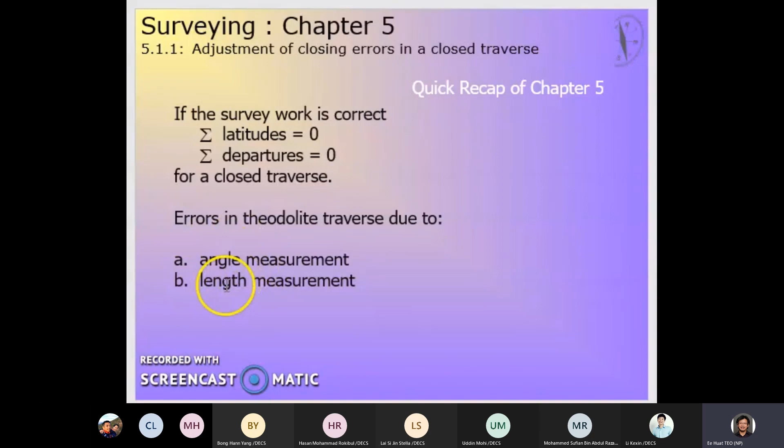However, we'll always be bound to make measurement errors when carrying out the traverse survey, and the error can be in terms of error in angle measurement, or it can also be in terms of error in linear or distance measurement.

So if you have an angular misclose, it means that the sum of the interior angles in your figure is greater or less than the actual sum of the interior angles. You can check whether the error is acceptable or not, and if it is not acceptable, then you have to redo the survey all over again.

Even if it is acceptable, you will still need to distribute the errors to make the angle more accurate before you continue with the rest of the calculations.

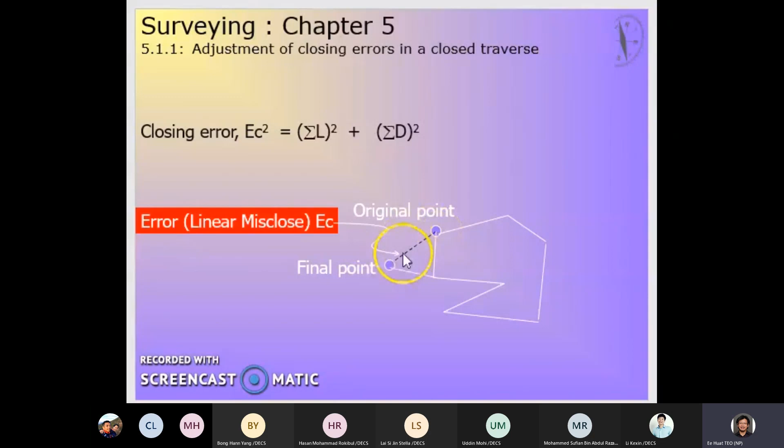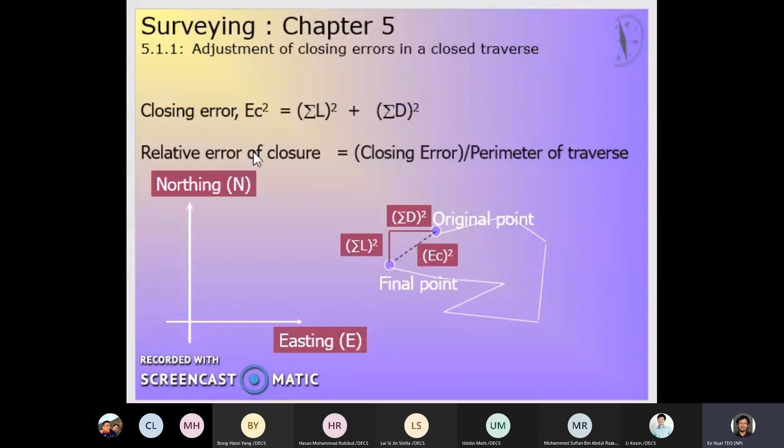Even if it's accepted, you will still need to carry out distribution of the linear misclose to make your data even more accurate. That is the next part that we will be talking about.

Also, we are saying that even if your error can be accepted, the latitudes and the departures should be adjusted so that the sum of the latitude equals 0 and the sum of the departure equals 0.

So the process or operation of applying correction to the latitudes and departures of the lines, we call balancing the traverse. There are two ways to balance the traverse: you can use the Bowditch method or the transit method. For this module, we are just going to stick to the Bowditch method.

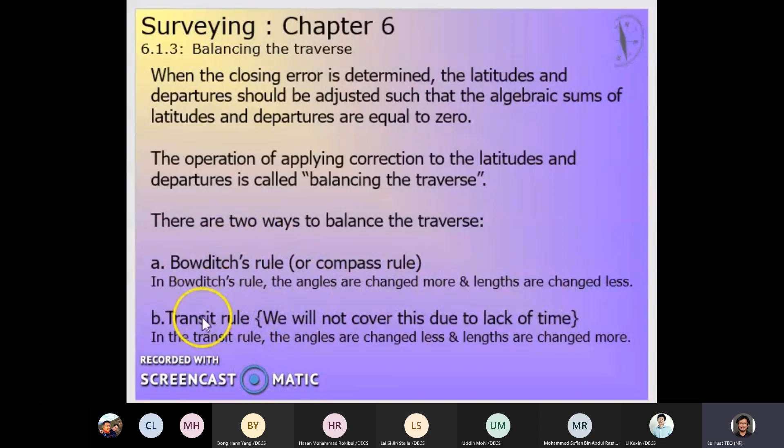In the Bowditch method, the angles are changed more and the lengths are changed less. For the transit method, it's the other way around. We use the Bowditch rule to distribute the linear misclose when the angular as well as the linear measurements are taken with equal precision.

By this rule, the total error in latitude and departure is distributed in proportion to the length of the side. So the formula is this: correction to the latitude equals negative the total error in latitude multiplied by the length of the line divided by the perimeter of the traverse. In the same way, correction to the departure of the line equals negative the total error in departure multiplied by the length of the line divided by the perimeter of the traverse.

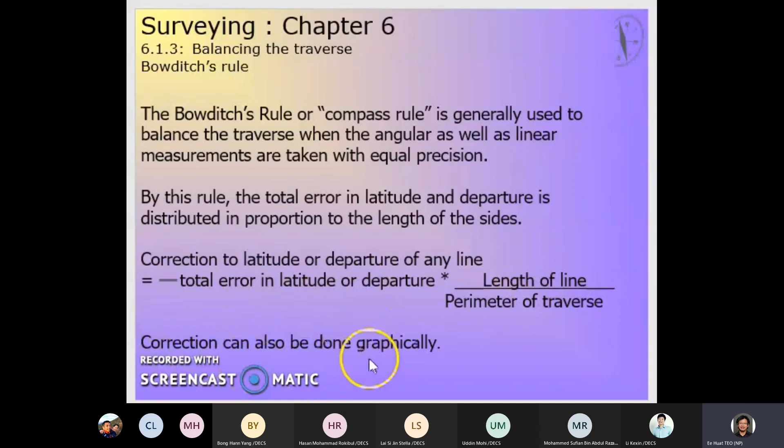Correction can be done graphically, but normally we do it numerically, that means we work out the value.

Now this is example 1 in your notes talking about the two coordinates A and B, and given the coordinates you can work out the whole circle bearing, so on and so forth. You would have gone through this in chapter 5, so I will leave it as it is and we'll go on to example 2.

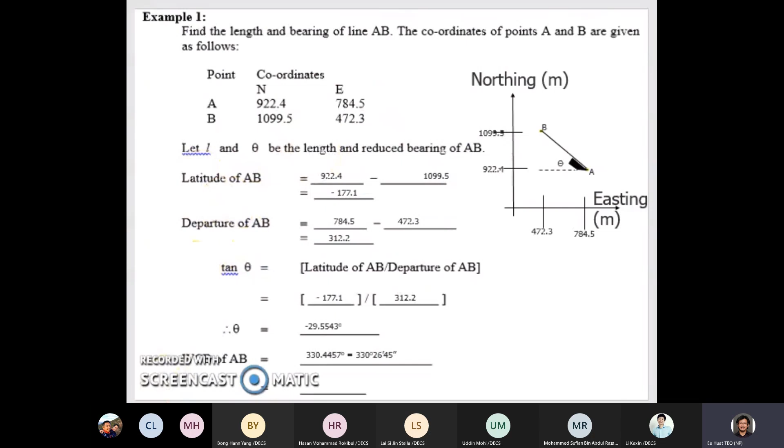...coordinates, you can also check what is your relative error, and then after that you can do the balancing using this Bowditch method.

So let's look at how to do it, and we will start by drawing the lines AB, BC, CD, and DA because we know the bearing.

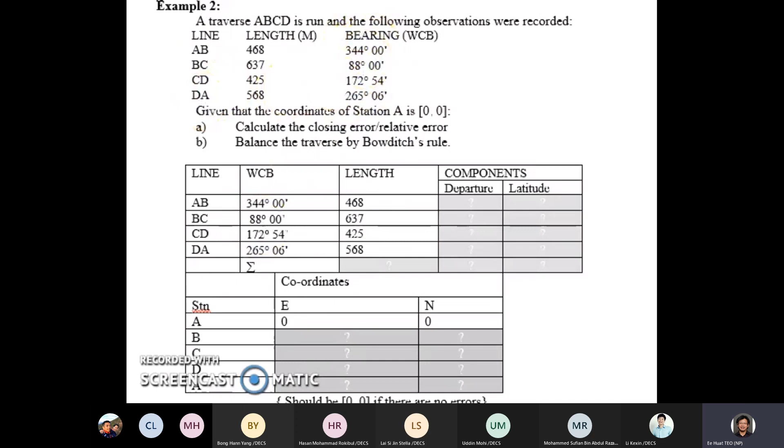So if our north is pointing in this direction, then AB will be probably in this orientation because it's around 344 degrees. Then BC will be in this direction because it's around 88 degrees. CD will be in this direction because it's around 172 degrees. And then DA will be in this direction because it's 265 degrees around there, okay?

So the lengths are given to you. So for every line, starting from AB, you can go and work out what is the latitude, what is the departure.

Okay, so let's do that. By now, I would expect you to know how to calculate the latitude and the departure for all the lines. So for example, AB, I will expect you to get the latitude if you know the length and you know the bearing.

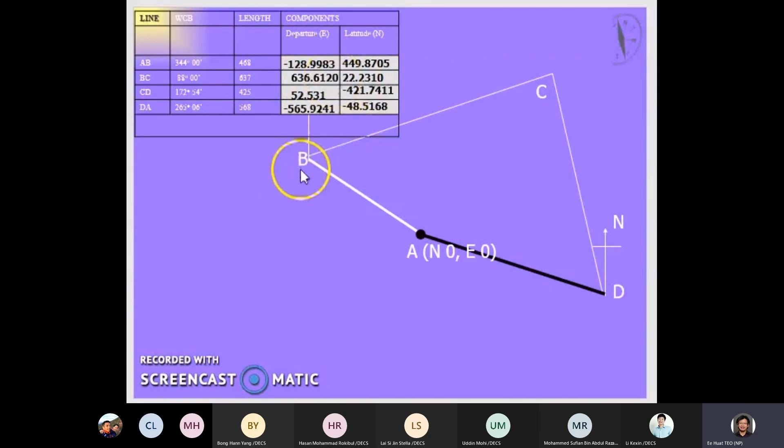Once you have all these latitude and departure values, you will be able to work out the coordinates of stations B, C, and D, because you know the starting coordinates of A, which is 0, 0. You can then just take the northing plus the latitude, the easting plus the departure to get the next coordinate, northing plus latitude, easting plus departure to get the next coordinate, and so on and so forth.

I'll leave it to do that, and it should look something like this. So this should be your coordinate. A should be 0, 0. B, your coordinates - take note, normally we will write the northing first and easting second, but this one is the reverse order, so just make sure you are careful about that.

So for B, this will be the set of coordinates. C, that will be the set of coordinates. D, that will be the set of coordinates. And you can actually do a calculation of this point A, and you find that it is not 0, 0. It should be 0, 0, but it is not.

Meaning that you started off with point A, then you go to B, you go to C, and then you go to D. Then by the time you come back to A, you actually miss closing to point A. You are a bit of a distance off. And this is the calculated coordinate of point A, so that's why there's some linear misclose.

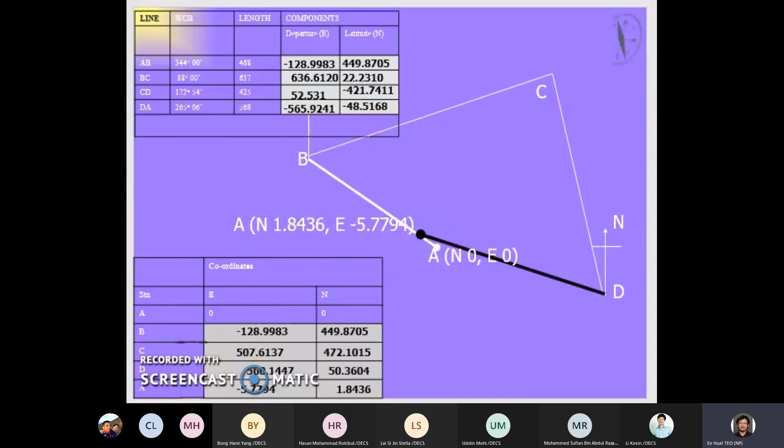So you sum up your latitude, you should be getting a value of 1.8436. You sum up your departure, you should be getting a value of minus 5.7794. Then you can find out what is your linear misclose - square root of the square of your latitude plus the square of the departure, then you take the square root. You should be getting 6.066 meters.

And your relative closing error will be 6.066 divided by the total distance of your traverse, which is distance AB plus BC plus CD plus DA, which is 2098 meters. So you go and take the ratio - it will be 1:346. So 1:346 actually is worse.

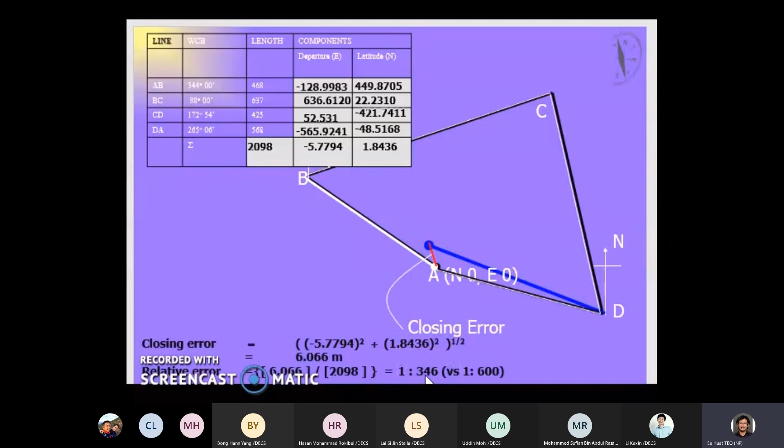Worse than 1:600. In real life, if it is worse than 1:600, that is no good, and you cannot use the data. You have to redo the field exercise to collect the length and the angles all over again. But for this exercise, let's continue.

Let's just use the value here to do the Bowditch method to distribute the linear misclose - so much for the departure and so much for the latitude - so that you get a feel for how to use the formula to do the distribution.

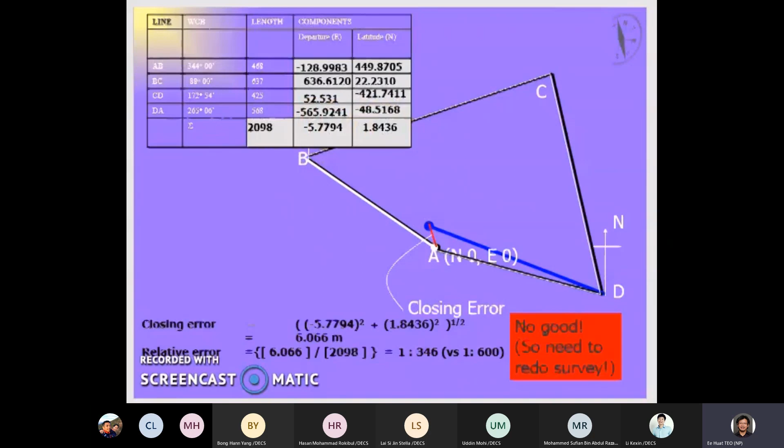So let's start with the line AB. The line AB, the length is equal to 468 meters. Total length of the traverse is actually 2098. So the formula for correction to the latitude will be the error in the latitude. In this case, our error for this example, the total error is 1.8436.

So there's a minus one sign, so be careful, minus sign in front. So multiplied by the distance of the line divided by the total distance of the traverse, you will get a value. You can round it up to 4 decimal places first and use that.

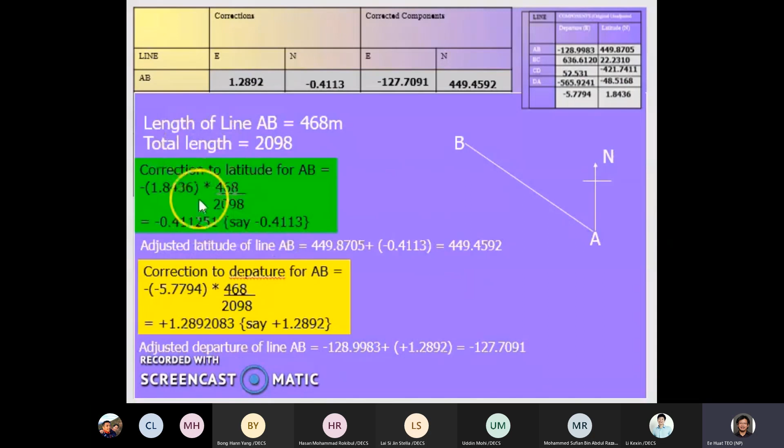Once you have the correction to the latitude, you can adjust the latitude of the line. Originally, your latitude of line AB is 449.8705, that's the original calculation. You add your correction, and this is your adjusted latitude.

So you do the same thing for the departure. For AB, since it's departure, you need to get the value of the departure, not the latitude. So the total departure, summation of your departure, is minus 5.7794. So you put it here. If your departure is a negative value, you put a negative value, so there's a negative in front. Negative times negative ends up positive. Whereas just now, a negative times positive gives you a negative value.

The length of AB is still 468, the total length of the traverse is still 2098. So you work out this number, you'll get positive 1.2892083, and you round it up to 4 decimal places. So now your adjusted departure of line AB will be your original departure plus this particular correction.

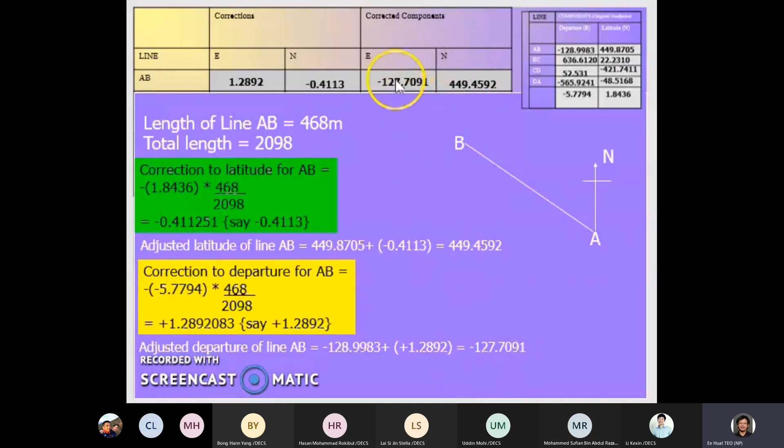So you can have a table to put in your adjusted latitude and your adjusted departure, and you continue to build up your table.

Now let's look at line BC. For line BC, the length is different, it's 637. So your correction for line BC will be 637 over the total traverse distance, and your latitude will still be the same value of 1.8436, so you can put it there and round it up to 4 decimal places.

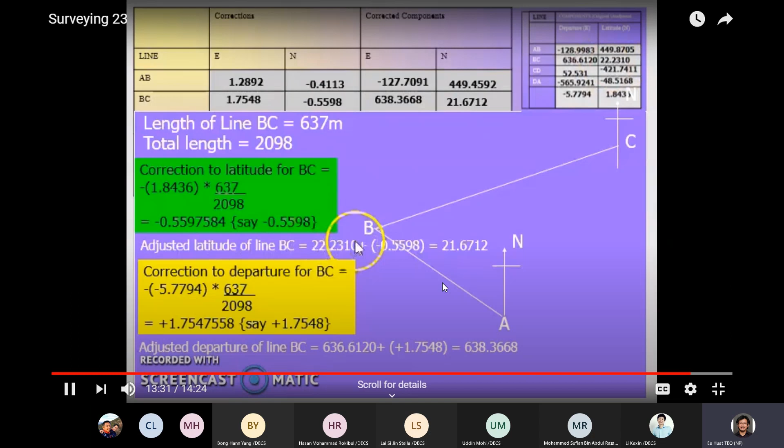You'll get minus 0.5598. Your originally calculated latitude was 22.2310, so now your adjusted latitude will be 22.2310 plus this correction, giving you this value, which you put into the table.

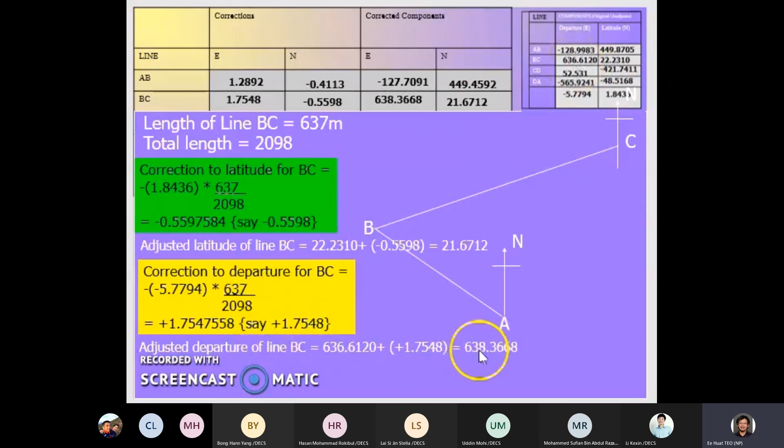The correction to the departure for line BC is done the same way. You find the total departure, summation of the departure, which is this one, and again there's a minus sign in front, so minus times your negative number gives you a positive number. The length of BC is actually 637 meters, so you put 637 meters here and round it up to 4 decimal places. Now you can find the adjusted departure for line BC by taking the original departure plus this correction, giving you the adjusted departure, which you put here.

Let's continue with line CD. Again, the distance is different, 425 meters. So the correction to the latitude of line CD uses 425 meters divided by the total length of the traverse. The sum of the latitude is 1.8436, so you put that down, and you get a negative value. Round it up to 4 decimal places, you get negative 0.3735, so your adjusted latitude of line CD becomes negative 421.7411 plus this negative number.

So that's why you get negative 422.1146. You can put that under this particular cell.

Continue with the correction of the departure for CD. You take the sum of the departure, which is minus 5.7794, multiplied by the negative sign, then you get the positive number. Round up to 4 decimal places, so 1.1708. Now take the original calculated departure of 52.531 plus the correction, and you get 53.7018. Then you can continue to the next line, DA.

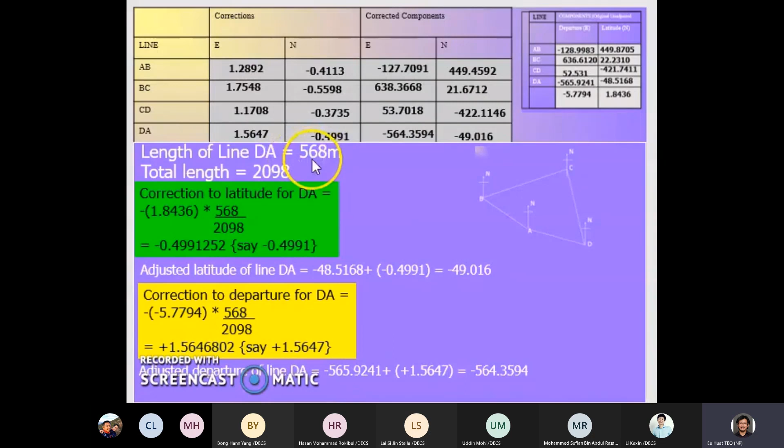So for line DA, again the distance is different, it's 568 meters. When doing the correction for the latitude of DA, you need to use the 568 meters.

Other than that, the sum of the latitude still has no change with this number here. You can round it up to 4 decimal places, and you'll get negative 0.4991. Your adjusted latitude of the line DA then becomes the original latitude plus a negative number.

Add the negative number, you get minus 49.016. So for the correction to the departure of the line DA, again use the distance 568 meters, and you can work it out. So you are going to correct 1.5647 meters. Your adjusted departure of the line DA becomes minus 565.9241, then plus this correction you get minus

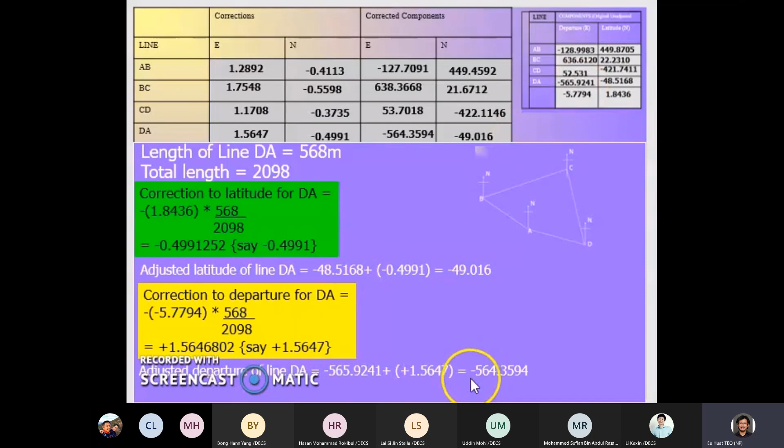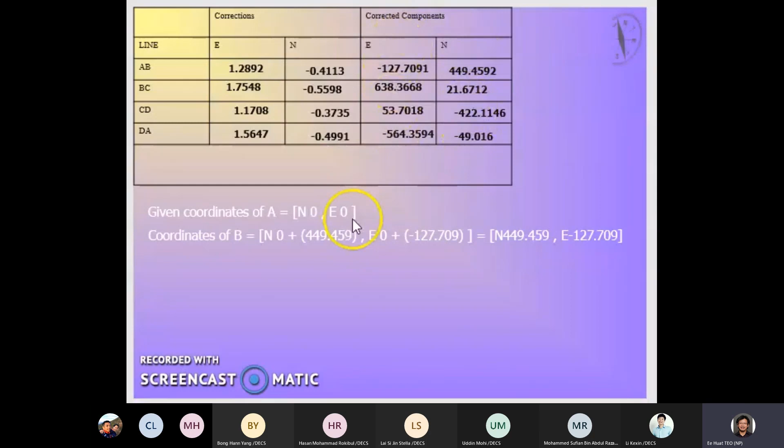4.3594. So once you have your corrected latitude and your corrected departure, you can start to calculate your coordinates all over again, and now your coordinates will be more accurate, because you already distributed the linear misclose.

So your given coordinate for station A is still northing 0, easting 0, so this one you don't need to do correction. Coordinate for B now, just take northing plus latitude - take note, this one is the latitude - so northing plus the latitude, the easting plus the departure. So you get this set of coordinates, which are more accurate compared to the previous calculation for station B.

Then for station C, same thing. You take this northing plus the latitude, the easting plus the departure, and this is the coordinates of your station C, which is more accurate.

So do the same thing for your station D. Your station D, again, the northing plus the latitude, the easting plus the departure, so that will be the coordinates for your station D.

And then you can do a recalculation to find out the coordinates for your station A. So you take the northing plus the latitude, this easting plus the departure, and if your distribution is done perfectly, you should get back the original value of your given coordinates, which should be 0, 0 in this case. But for our case, we don't get 0, 0, we get actually 0.001, or 1 mm for the northing, 1 mm for the easting.

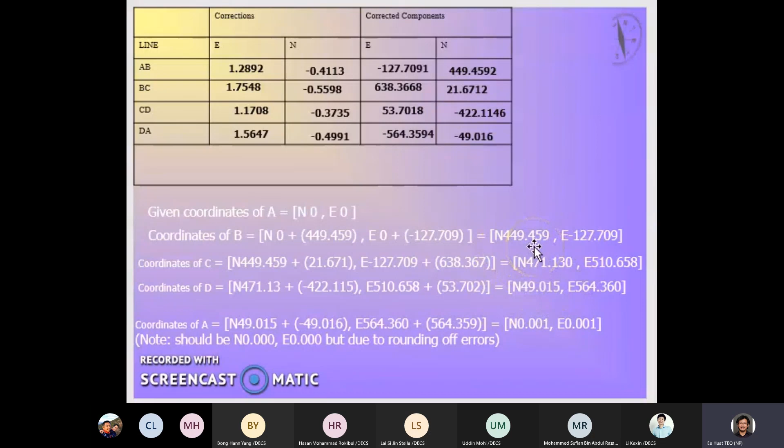That is because of our rounding off. So normally, if the difference is 1 mm, we will accept it's okay, meaning that we can accept all these coordinates for our surveying and further construction and development works. So this is a summary of the corrected coordinates, the northing and the easting, for the stations A, B, C, and D.

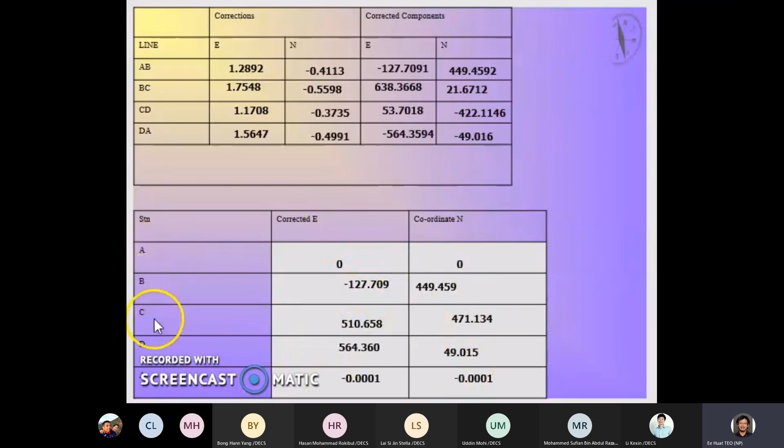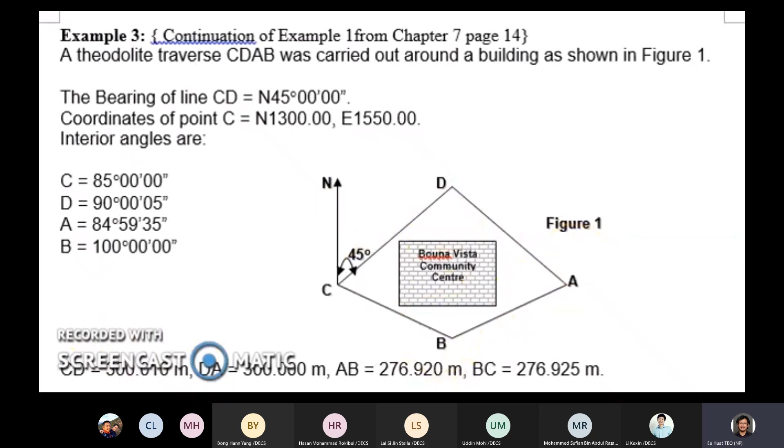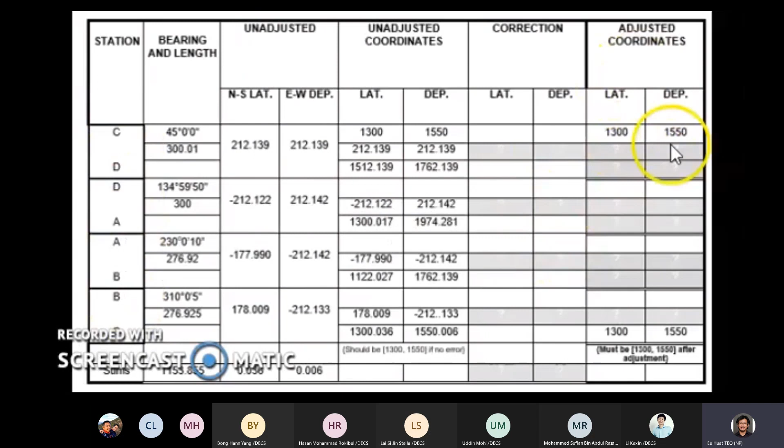Let's look at the continuation of the example in chapter 7, where we calculated the unadjusted coordinates of the stations D, A, and B. We are going to continue with this example where we use the Bowditch method to distribute the linear misclose so that the coordinates of stations D, A, and B are more accurate. So now that we have filled up this part, we will carry on to use the Bowditch method to calculate the correction to the latitude and departure for all the lines CD, DA, AB, and BC, and then we can go and calculate the adjusted coordinates.

So the correction to the latitude for the first line - the first line is CD, so the length of CD is 300.01. This is the sum of the latitudes, and this is the total distance of the traverse. So we get the correction. You can leave it to 4 decimal places, or normally it's 4 decimal places, or even 3, but the best is 4 decimal places.

Same thing for the calculation of the correction of the departure - now you will be using the sum of the departure, and you can also leave it to 4 decimal places if you want. After that, you go and find out what is the adjusted latitude, by taking the calculated latitude plus your correction. Do the same thing for the adjusted departure - calculated departure plus your correction. So you get the new set of values.

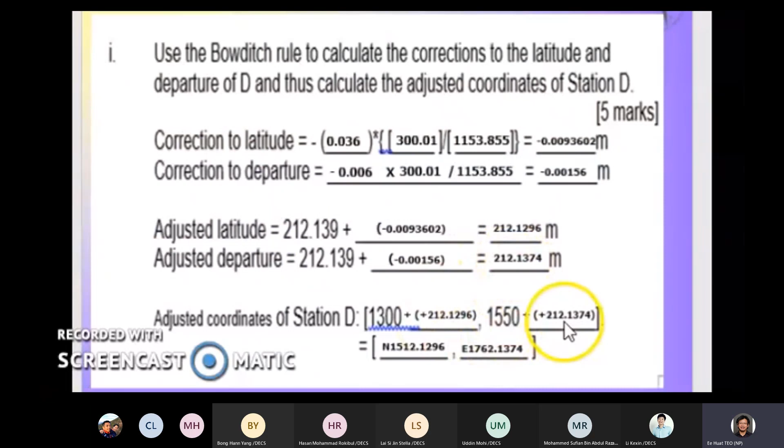So now your station D, you take the northing plus the latitude - that means your adjusted one - easting plus the adjusted departure, and you get the new coordinates. This coordinate will be more accurate. Same thing for the line DA.

For the line DA, the distance now is only 300 meters. Your correction to the latitude will be so much, your correction to the departure will be so much, and you can calculate the adjusted latitude and the adjusted departure. Once you have that, you can calculate the adjusted coordinates of station A, taking the northing plus your latitude, the easting plus the departure, and you get the coordinates.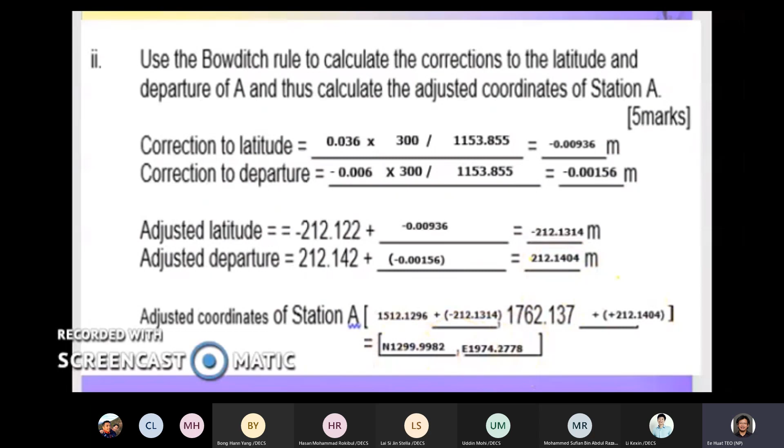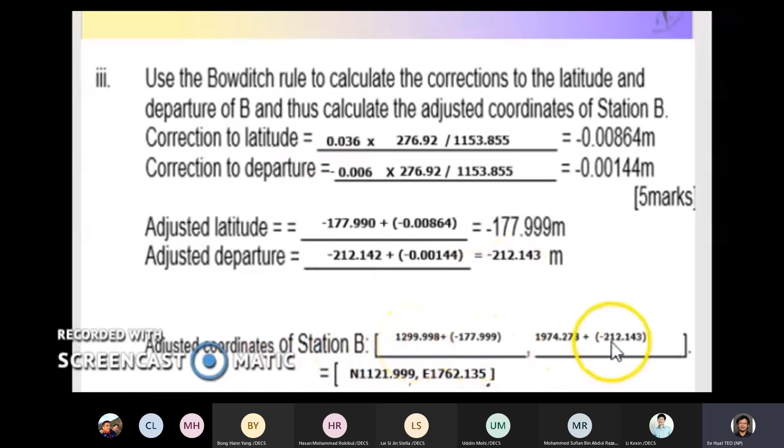Now you can look at the line AB. For the line AB, the distance is only 276.92 meters, so your correction to the latitude becomes so much, and your correction to the departure becomes so much. You can find out the adjusted latitude and adjusted departure, and therefore find the adjusted coordinates of station B by taking the northing plus the latitude, the easting plus the departure, and you get the adjusted coordinate of station B.

Finally, you can find the coordinates of station C by looking at line BC, which has a distance of 276.925 meters. The correction to the latitude becomes negative 0.00864, correction to the departure becomes negative 0.00144, and the adjusted latitude becomes 178. Adjusted departure becomes 212.134, and finally your adjusted coordinates of station C comes back to...

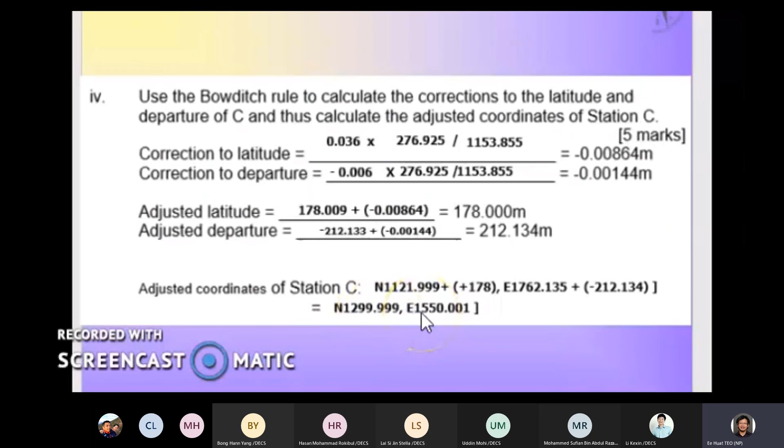1299.999 and 1550.001. So it is out by 1 mm, and that is due to the rounding off. That is acceptable. So finally, you can have a table that looks something like this.

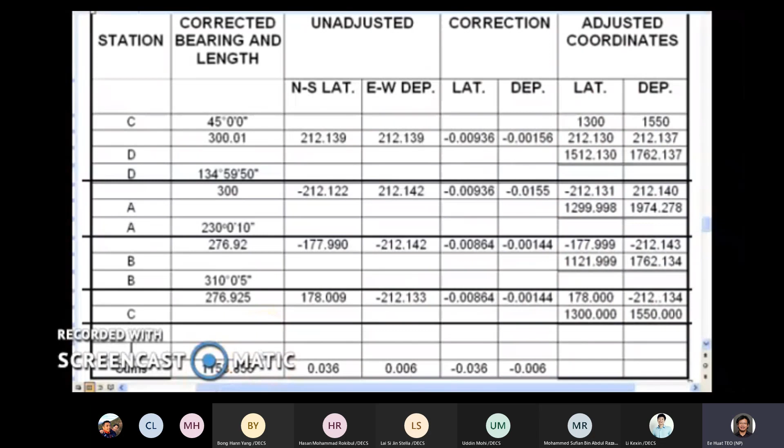So you have your correction and you have adjusted coordinates, and we will use all these adjusted coordinates for our development works. So that will end this chapter on the traverse.

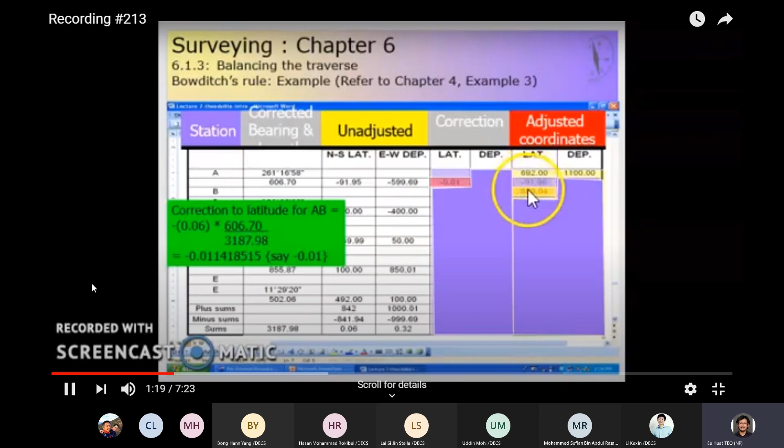So you have the correction for the latitude, then you can get your adjusted latitude. This one is the unadjusted, this value plus this value, you get your adjusted latitude to be so much. Then your coordinates will become 600.04. You just take this starting northing of point A, station A, plus the latitude, adjusted latitude of the line AB, so your northing becomes 600.04.

Then after that, you can do the correction to the departure for the line AB. For departure, you'll be taking a value of 0.32 because that is the sum of the departures from your traverse. The line AB is still 606.7 in length, so no change to this number here. So end up you're going to get minus 0.0608975. So again I'm rounding to 2 decimal places because I'm going to show for 2 decimal places.

Let me repeat again, normally we take it to 3 or 4 decimal places, 2 is not accurate enough. Anyway, if we round it up to 2 decimal places, that is our correction, then our adjusted departure will be the original departure plus this value here. Negative value plus another negative value, so we get minus 599.75. Therefore the coordinates will become the easting plus the departure, so we get 500.25. This becomes the coordinates of our station B.

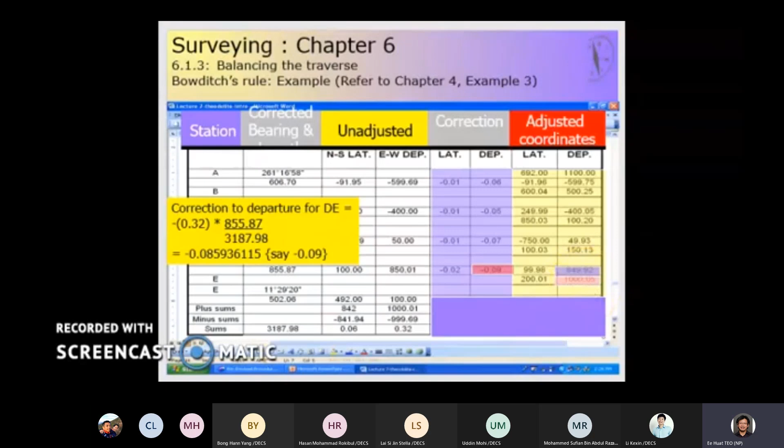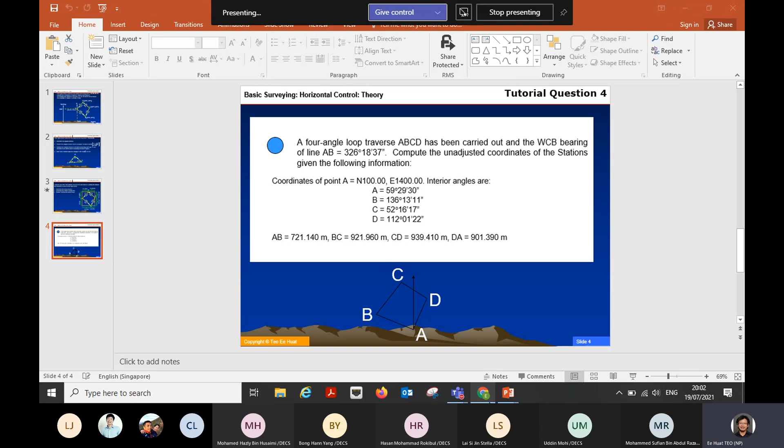This is the question, found in chapter 5, the tutorial question. So if you go to chapter 5 and look at the tutorial questions, you should be able to find this particular question. Can everybody find it? We're going to go through this question step by step.

Is it okay? No response, so I don't know whether to wait or not. I need some response. Only Mr. Bong is with me. The rest are not. How about the rest? Kexin, thank you, I can see your light flashing. So only Mr. Bong and Kexin. Mr. Bong and Kexin only, is it? Okay, never mind, since only two, I don't mind.

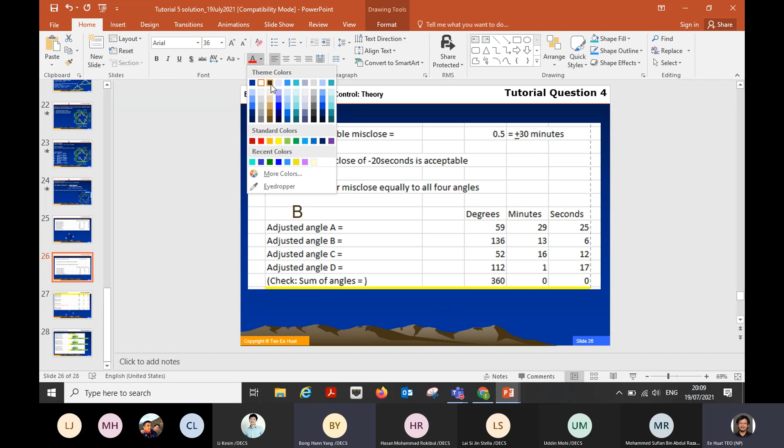B. 136 degrees, 13 minutes, 6 seconds. Wait.

This angle B, because you see, here I put down my angle B as 59, 29, 30. Can you see? Yeah, this is my angle B. So when I go and do the adjustment for angle B, I will add negative 5 seconds, so you get 59, 29, 25. So that means this one is actually B.

The angle B should be 136 something, right? Are you referring to from here, or this one? Oh okay, wait. Okay, this is A. So that means A is this. So that means... that means A is not correct lah. This is A, how to say? Let me come back to here again.

One at a time. A is 59, 29, 30. Fine, 59, 29, 30, so that means this one should be A. So I change it so that it's easier for people to follow. And after that, okay, 52, that one, 52. This one is C, okay lah, C lah. 112 is D.

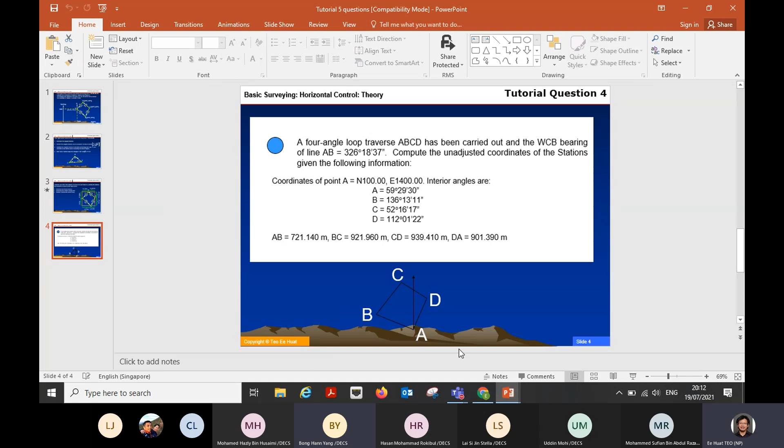So far, yes okay. Then after you need to use the bearing, okay, of the one line, okay, they give you the line AB, okay, AB is 326, then 1837, okay. So from there, okay, you try to work out the rest of the bearing of the rest of the lines, okay. So that part, let me just go and get a calculator.

Okay, calculator is not here. Okay, so I don't have a calculator with me, so you have to go and do the calculation for me. So Mr. Bong, just go through the calculation for me.

Okay, so let's do line by line. The first line, okay, AB is 326, 1837. This one okay, right? Okay, so then the backward bearing will be this angle subtract away 180 degrees. So it'll be 146, 1837. This one okay, not okay?

Wait, I see. You just take 326 minus 180. 326, 18, 37 minus 180. 146, 18, 37. Okay, yeah, okay.

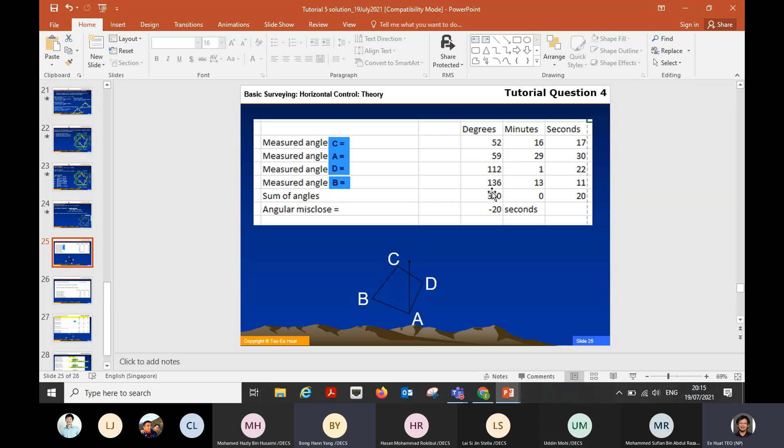Oh sorry, you should be subtracting the angle B. Angle B, okay, angle B is 136 degrees, 13 minutes and 11 seconds. Sorry, this one is angle B. 11 seconds is before adjusted, ma. We have to go for the adjusted, right? Correct, you are right. Use this one: 136, 13 and 6. Yeah, so use this one.

So that means you use your 146, 18, 37, subtract away the... yeah this one, okay, 136, 13, 6. Okay, so you get, what do you get? 10, 5, 31. 31, huh? Okay, so 26 should be 31 lah.

Okay, double check, okay, two of you all double check for me. Alright? Oh, so you should be getting 10, 5, and 31. Okay, no, okay? Yeah, yeah. Okay, huh? Then you continue to the next line, okay?

By trying to find the backward bearing of the line BC first. Forward bearing of the line BC you found already, 10, 5, 31. Okay, backward bearing of the line BC you want to find, you will add 180 degrees. Okay, 190 degrees, 5 minutes, 31 seconds.

So also 26 change to 31 lah. Yes, correct, also let's do that. Okay, once you have found the backward bearing of the line BC, you can then look at the adjusted angle C.

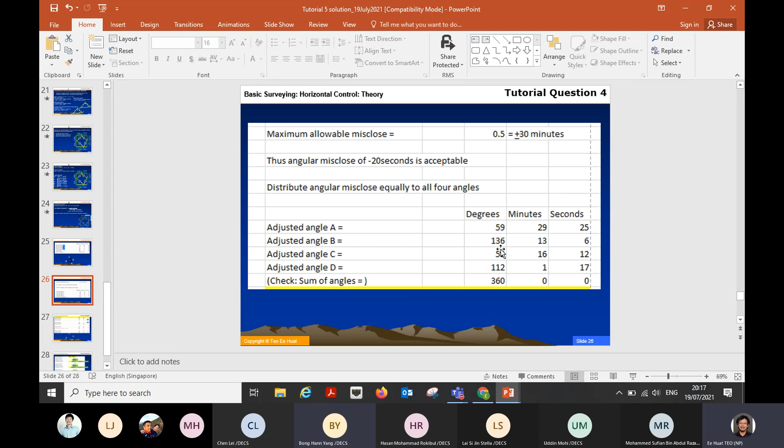Okay, adjusted angle C. So your adjusted angle C is 52, 16, and 12. Okay, 52, 16, and 12. So you take your backward bearing, okay, 190, 5, 31, minus the 52, 16, and 12. Okay, and what do you get? So the 9 changes to 19. So this one is 19. Yes.

Then after that, you look at the line for the next line. As usual, you go and find the backward bearing of the line CD first. Also, now you take your forward bearing plus 180 degrees. So, am I correct to say that it will be 317, 49, 19? Yes.

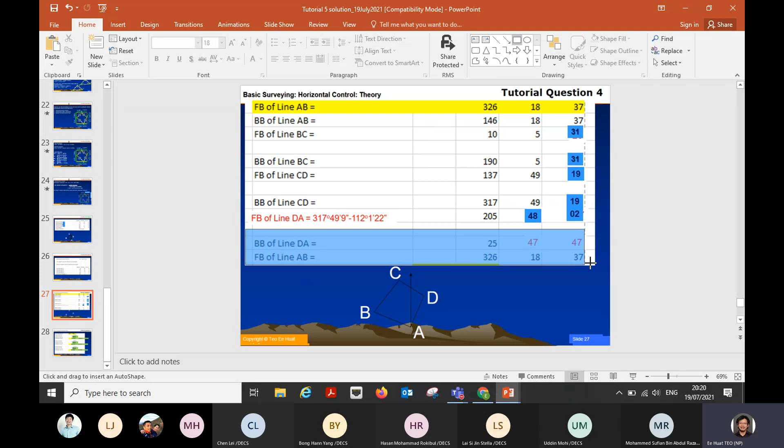Now this one is just me doing my own check, okay? You don't need to do the check if you don't want to, but I just want to do a check to make sure I'm getting the angle correct. So let's not do the check since you don't need that for your calculation. Let's just take that out.

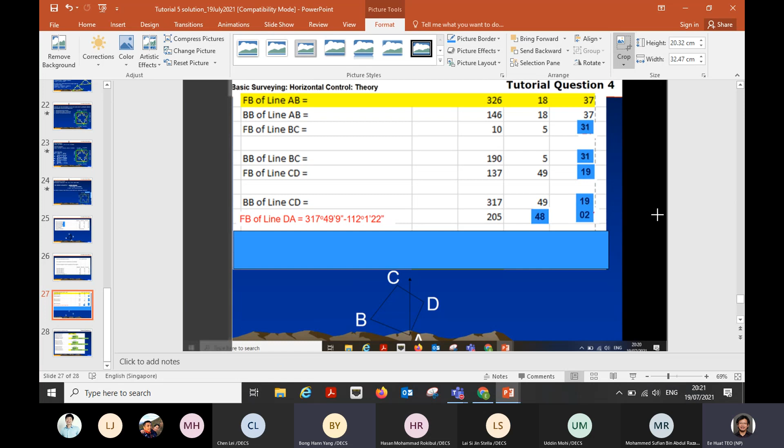So once you have the forward bearing for all your lines, you can go ahead to calculate the latitude and departure for all the lines. Starting with line AB, the distance of line AB is 721.14, and the coordinate is N100 and E1400. This is what you have been given. So the forward bearing of line AB is 326, 18, 37.

So you take this angle, cosine of this angle multiplied by the distance of the line, that will give the latitude. So can you check the latitude? Do you get 600.027? Is that okay? I think Mr. Bong, you get the number, right? Yes. How about Chen Lei?

Sorry, Mr. Teo, the calculator not in my hand, let me find it. Yeah, I also trying to find my calculator. I left it in school, so I don't have a calculator with me. Okay, so we can continue.

Also for Mr. Bong, the departure of the line is minus 400.013, you're okay or not? So if that's the case, then the coordinate of B will be 700.027 and 999.987. So this one, you're okay with it? Yes. Okay, so far so good, up to here. Okay, that's good.

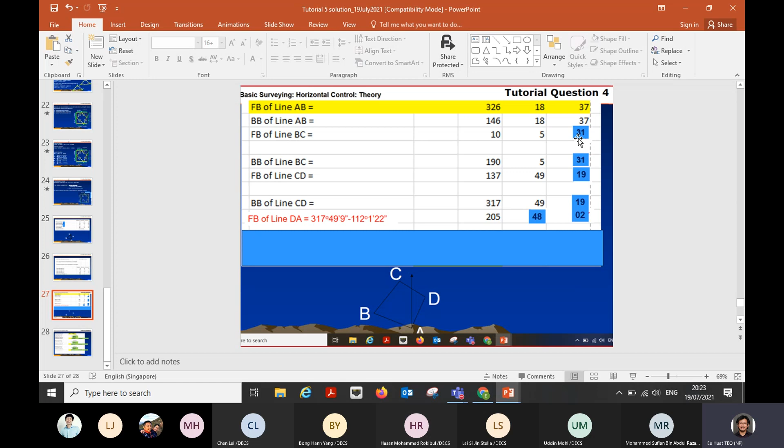Then you continue to the next line. So for line BC, you use the bearing of 10 degrees, 5 minutes, 31 seconds. Meaning that the cosine of 10, 5, 31 multiplied by the distance of 921.96 will give you the latitude. So what will be the latitude if you were to do the calculation?

What is the latitude? Can you let me know? 5, 21... 907.695. Wait, 907.615. No, 907.695. Okay lah, so I take that. It's okay.

Also 907.615. Okay, 69699. Okay, 90695, correct. Then your easting, this is the departure. The departure, I counter check. 161.553. Sorry, one more time. 161.553. Mm, yes. Okay, and who is that? Rockable, sir. Okay, alright, Rocky Boo.

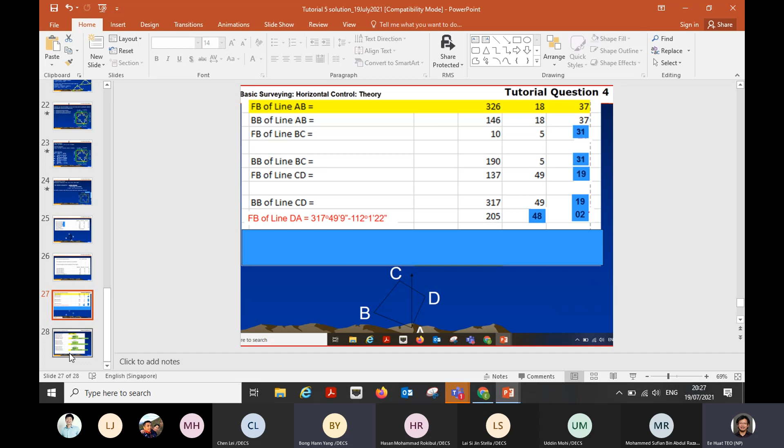So the line CD again, you look at the line CD, the bearing is 137 degrees 49 minutes 19 seconds. You take cosine of that multiplied by the length of CD, that will give you the latitude. You take sine of 137 degrees 49 minutes 19 seconds multiplied by the distance, that will give you the departure of line CD, right? So if you were to do that, tell me what value you are getting.

What is the latitude and what is the departure? Minus 696.161 meter, that is your latitude. How about departure? Departure is 630.754.

630.754, yeah, okay or not, Mr. Wong? Okay, can. Then you can find out the coordinate of point D, okay, and let me know. 911.561. Sorry, come again. 911.561. Easting. 1792.294.

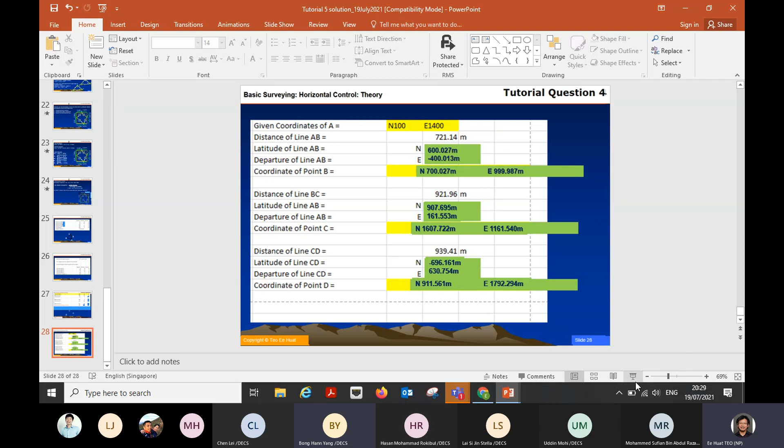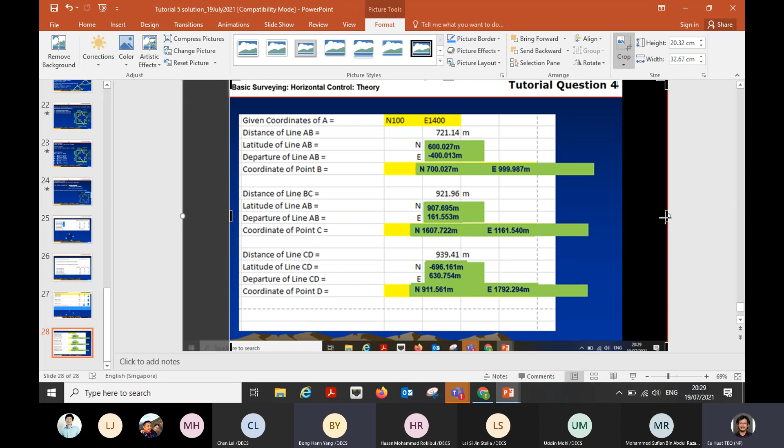Oh, Mr. Bong, okay with the number here? This one? Okay, can. Okay, let me just screen capture this one and save it. Let me just go here to check. Okay, good. So that completes the example.

Okay, so we solved out the typo error. Thank you for sharing that with me. Okay, any other question you all want to ask in general about chapter 4, 5 and 6, which is talking about horizontal control, the latitude, the departure, the easting and the northing.

Yeah, any question? Okay, the question just now - do we still need to do the linear misclose traverse distance to counter check the closing error or not? Yes, yes, yes, if you are doing a project, you will need to go and continue.

Or you will need to go back and do one more set, to get the coordinate of A, and you find that your coordinate of A is not exactly equal to N100 E1400. Yes, it will be different, because of the linear error.

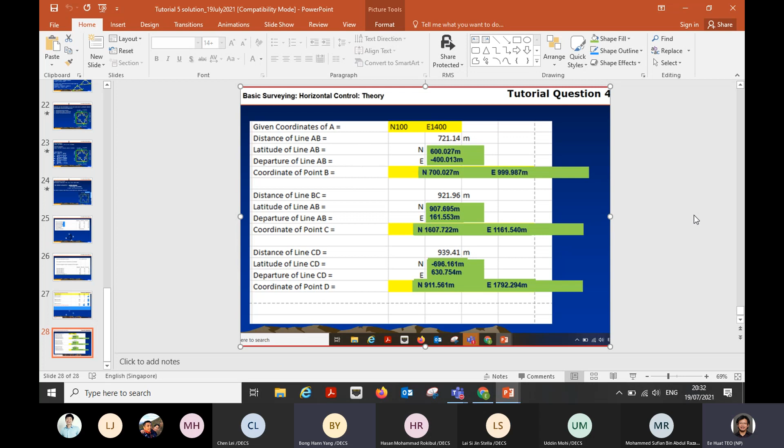Any question from any of the students that are around? Justin, you just came in, Justin? Justin? No, not around. So only Mr. Bong, Rocky Boo, and Chen Lei. Kersing is driving the car, so not around anymore. Reached home already. Kersing, reached home already? Yes, never... yes, oh, you're here, okay.

So if you missed what I've gone through, Kersing, don't worry, you can look at the recording. The recording will be up probably after 10 o'clock, so you can look at it tomorrow also if you want, or some other day. There's a recording - we went through the example. There were a few typo errors, so the numbers are not correct, okay.